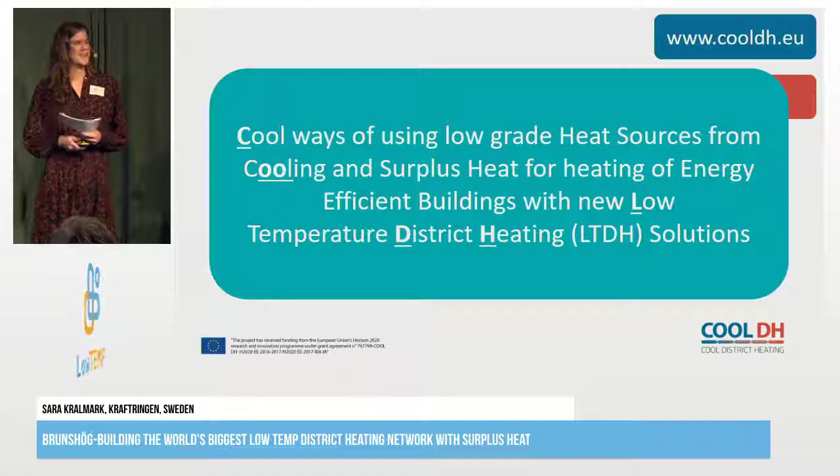I hope you're excited, I am. So the name of the project I'm working on is Cool District Heating, Cool DH - that's the homepage and also the hashtag if you want to use it. If you think the name Cool DH is because it's a cool, awesome project, then you're right. But you're also right if you think it's an abbreviation for cool ways of using low-grade heat sources from cooling and surplus heat for heating energy-efficient buildings with new low-temperature district heating, LTDH, solutions. It's also fine to just think of it as a really awesome project.

But first, some information about the company I work with, Kraftringen. Kraftringen is a municipally owned energy company headquartered in the city of Lund, just 20 kilometers from where we're sitting right now, with 260,000 energy customers and a little over 500 employees. We're counted as one of the largest energy companies in Sweden, and one of the things we do is district heating.

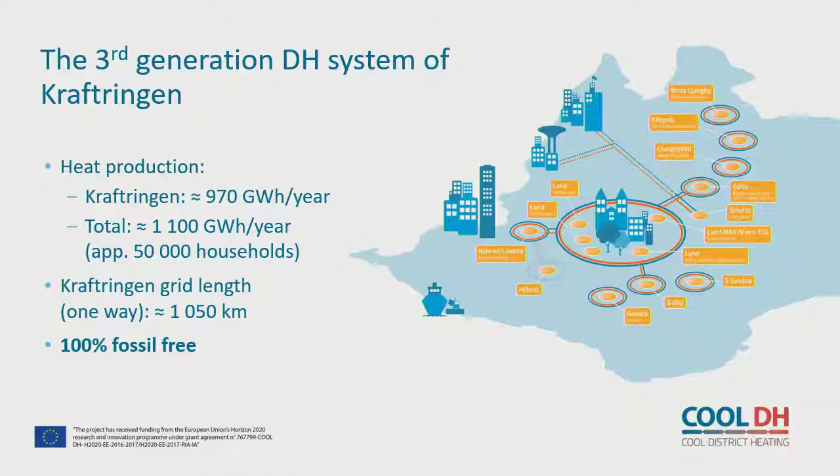Our third generation district heating network is just a little over 1,000 kilometers long, and it's connected to the networks in the cities of Helsingborg and Landskrona. We've formed a joint venture with the energy companies in those cities, allowing us to really optimize the efficiency of production. The amount of heat produced and distributed in Kraftringen's part of this giant network is 970 gigawatt hours per year - that corresponds to about 50,000 households for those of you who aren't nerds like I am.

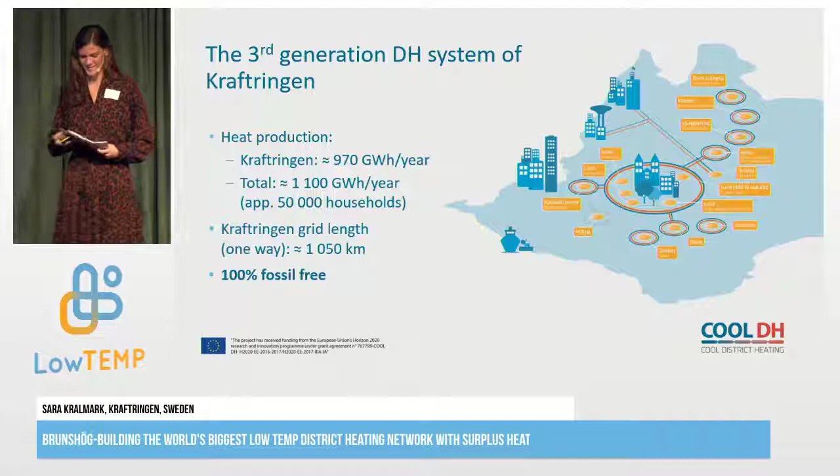We had the goal of making our district heating completely fossil-free by 2020, and we reached that goal last year in April. Yes, yes - you're way better, though, than my family and friends on this specific topic.

In addition to our normal, traditional district heating business, we're in the process of building the world's largest low-temperature district heating network. This is something we do in a city district in Lund called Brunshög, as part of the Cool DH project, which receives funding from the European Research and Innovation Program Horizon 2020.

Now, not only Sweden is part of the Cool DH project, Denmark is too. Do we have any Danes in here? Yes - you can clap now.

So in Sweden, we're building a network which will have a supply temperature of 65 degrees. You know why that's good? Because Britta and Sven and Kerstin told you before the break. It will be about 6.5 kilometers of pipes, and we're building it in previously undeveloped land.

In Denmark, they're building a smaller network. It has a supply temperature of 55 degrees, and they're building it in an area with mainly existing buildings. This project started in October 2017 and will continue for four years, until 2021. The aim is to develop, then demonstrate, then verify new and path-breaking solutions for district heating with low temperature, and of course to spread the knowledge, like I'm doing right now, to you guys, to Denmark, to Europe, and to the rest of the world, because this is very unique.

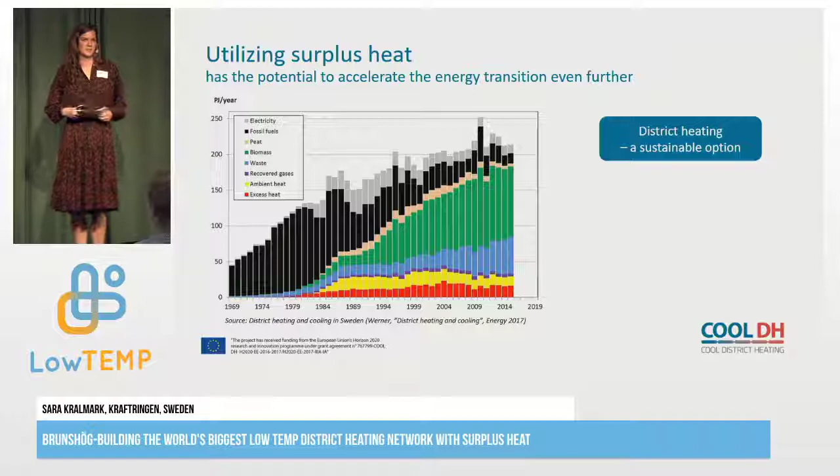During the last 40 years, Swedish district heating production has increased by 4 times. That's awesome, right? But at the same time, emissions from district heating have decreased by 90%. It means Swedish district heating companies have shifted from the black field, fossil fuels, to mainly green, which is biomass, and also the blue, some waste incineration.

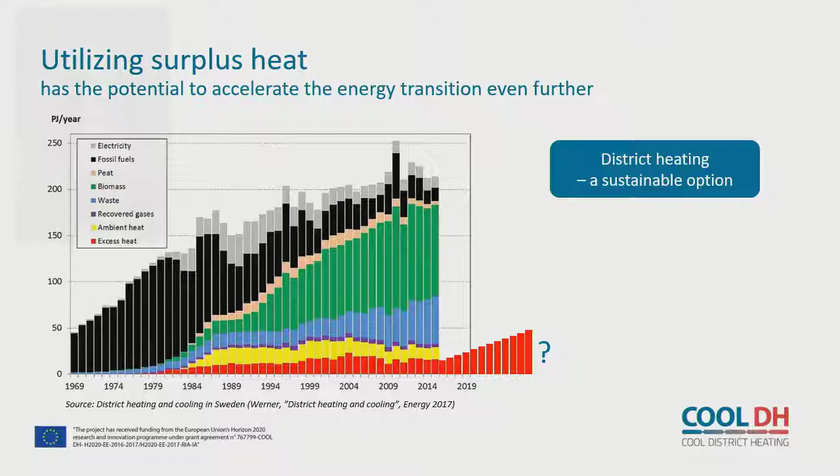Kraftringen is in the green field, 100% fossil free. Then we have the red field at the bottom. It says excess heat, and the question is how large the potential of excess heat in Europe is. That can answer why the European Union wants to finance a project on low temperature district heating. That's the context of this.

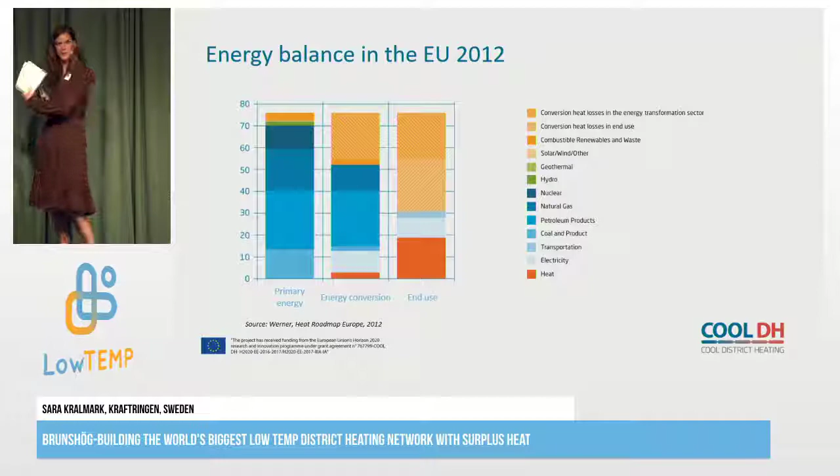I will guide you through this diagram. It shows the European journey from primary energy, that's to the left, for example in the form of nuclear power, some hydropower, I guess that's Sweden, and natural gas. To the right, you have what we use in the end, for example electricity, a nice kind of energy. We also have quite a lot of heat. What happens in the middle is that we convert the energy.

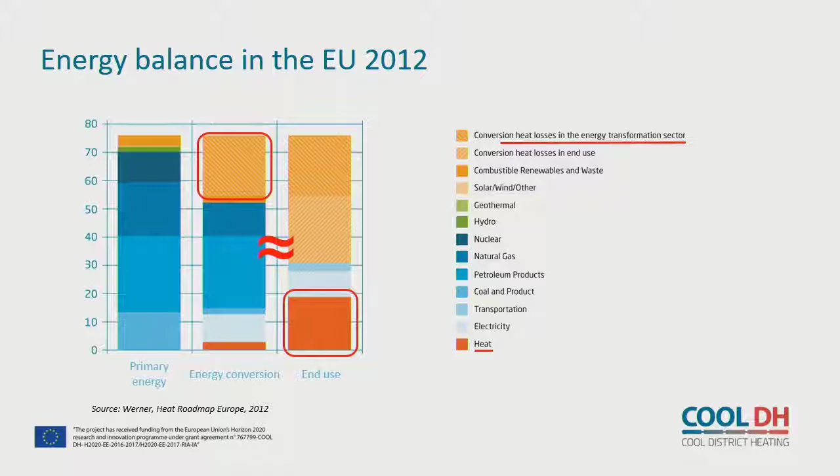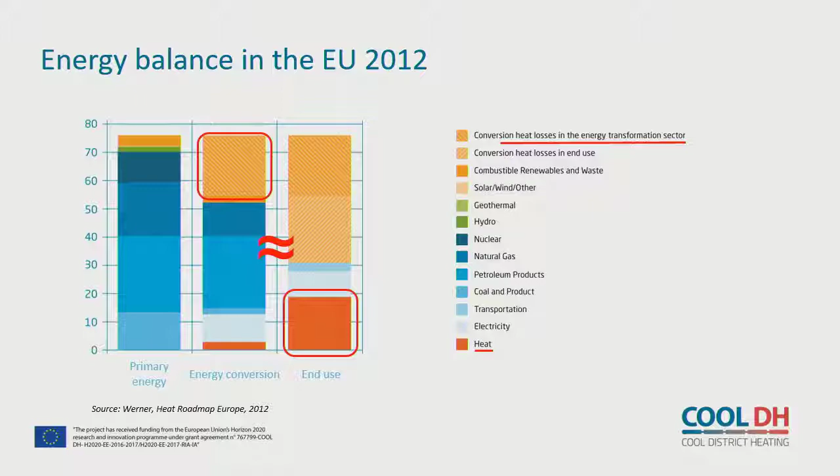It just so happens that during the conversion processes, we get a lot of excess heat, approximately just as much as the heat load that we use in the end. What I'm saying is that if we could just use all of the excess heat being produced only within the energy sector in Europe, Europe wouldn't have to produce any heat actively at all. That's a large potential, I would say.

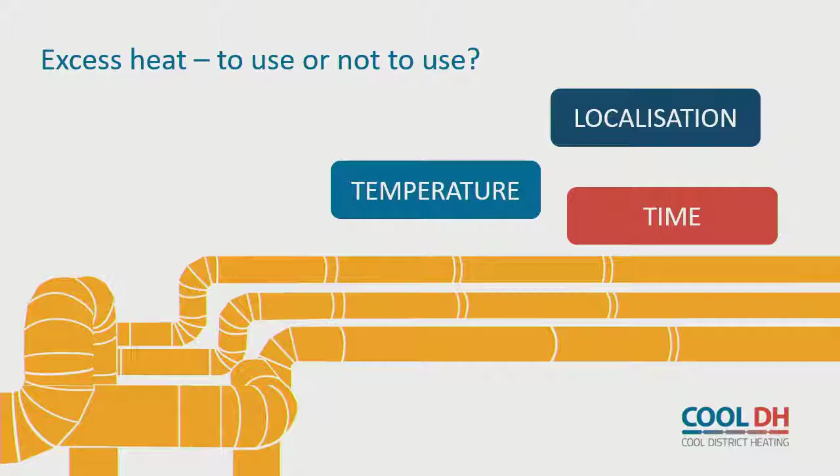So why is the utilization so limited? Well, it's not very hard, no one's being stupid. It's because of three factors that all affect the economy: time, temperature, and localization, I usually say.

Time, because this kind of residual heat often doesn't come when we want it. It also fluctuates a lot. It's like solar power or wind power. It's not a very reliable heat source.

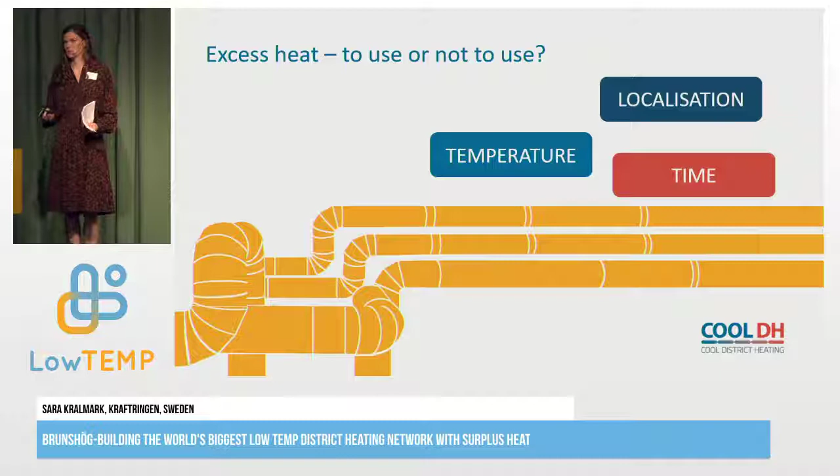Localization, because it may only be available at places far away from a city district or where there is a need for heat. You need a district heating network to actually distribute it, and that's not always the case. And finally, temperature, because very often this residual heat comes at temperatures that are wrong, meaning too low to be used in the traditional 80, 90, or 100 degree traditional district heating networks.

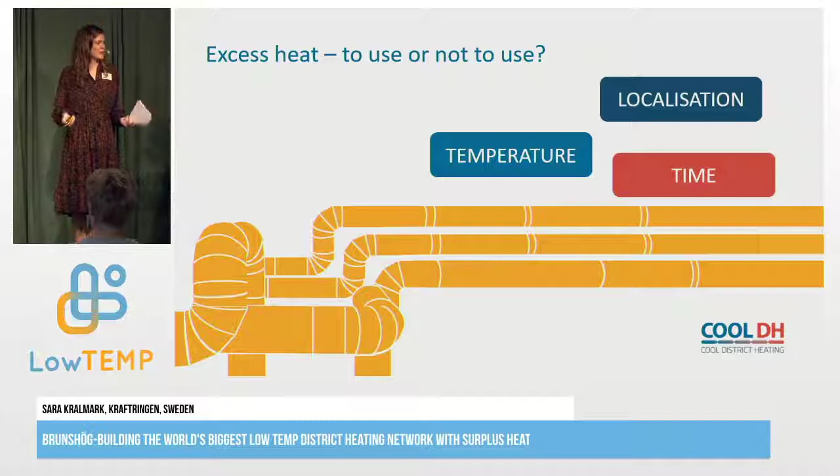So with this background, I will now tell you about the Swedish district heating CoolDH site, which is a place where we are overcoming all of these three factors.

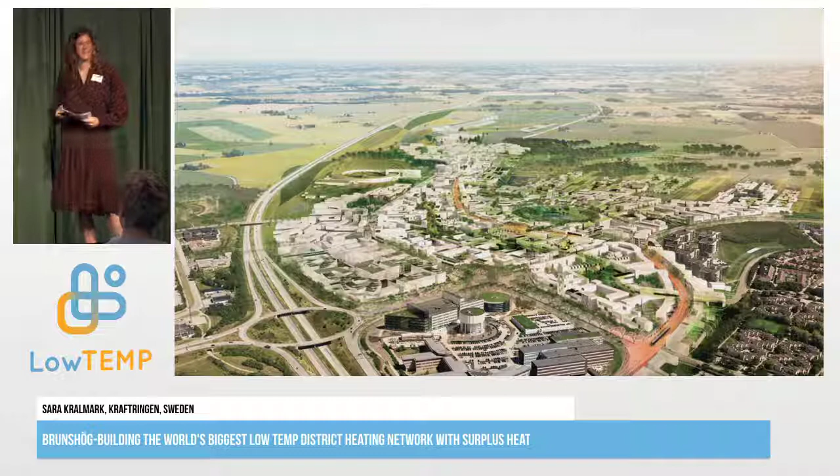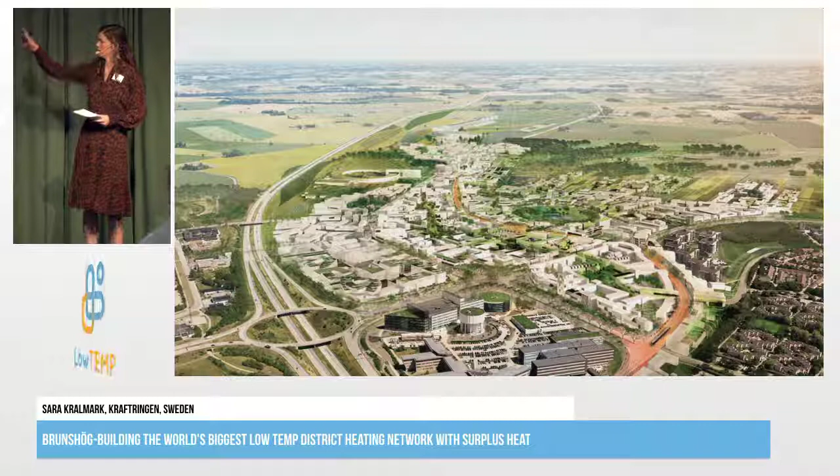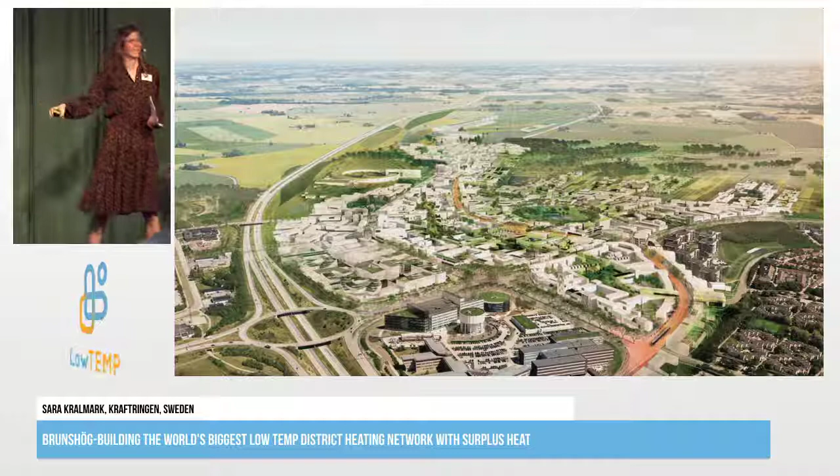Yeah, wow, this is a vision image. Thank you, Reto. This is a vision image of a new city district being built in the northeastern part of the city of Lund. In the future, we will have 40,000 people living and working in this area. For you Swedes, that's like taking the city of Trelleborg, I'm from Skåne, and putting it in the outskirts of Lund. It's quite a large city district.

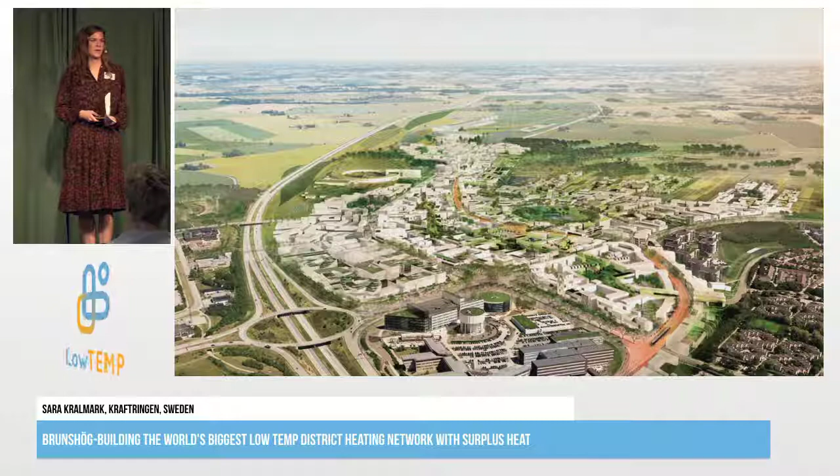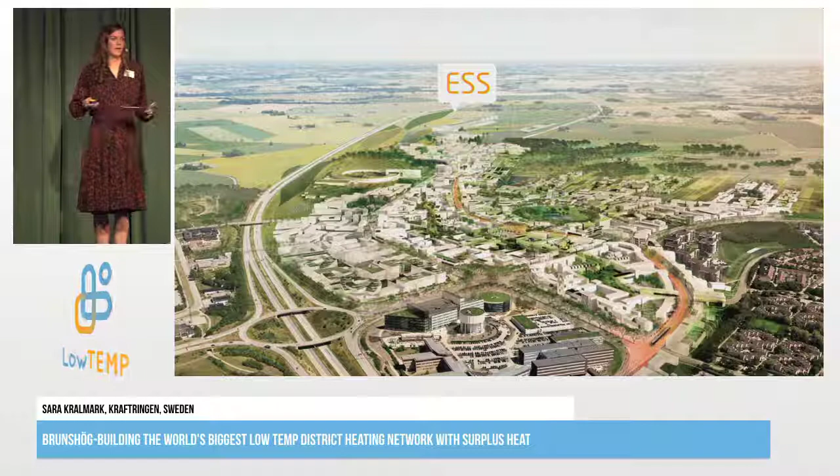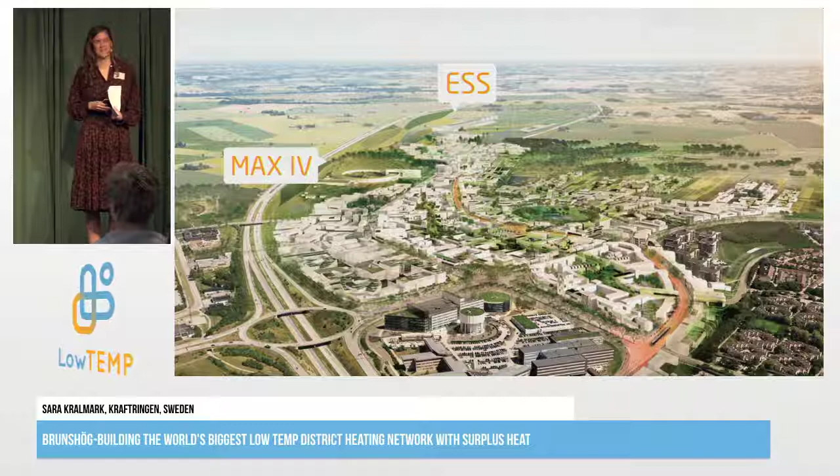The main reason for expanding Lund in this area is the ongoing construction of the International Research Facility European Spallation Source, or ESS, as you might have heard of. It's also because the already existing Swedish research facility MAX IV, located just adjacent to ESS. For your information, yes, there is a MAX 1, 2, and 3, but they're much smaller, more like normal laboratories, further down in the central part of Lund.

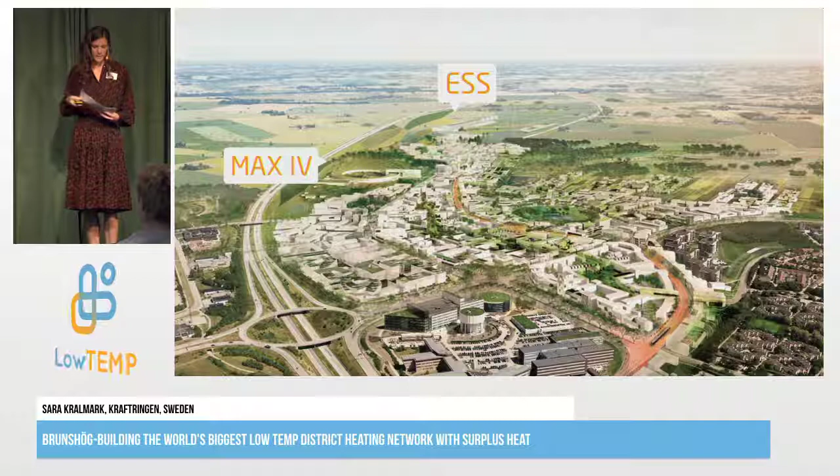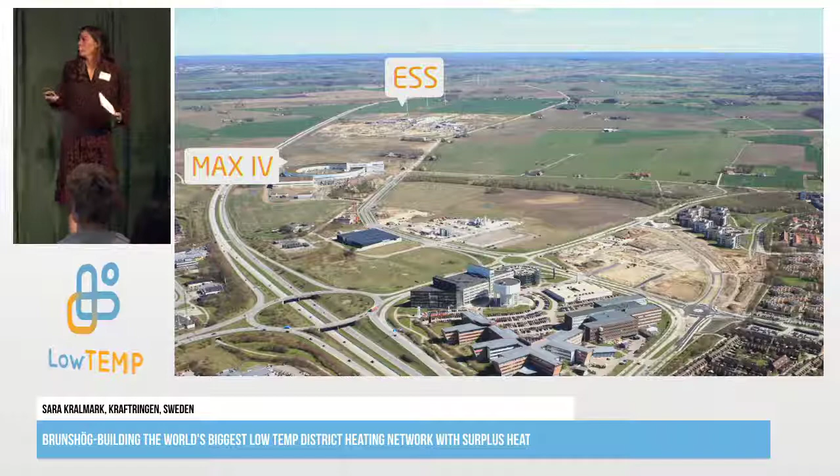However, this is what Brunshög looks like today. Yep, it consists mostly of fields, and even though they've started to build buildings down here in the southern part, it will take decades before the whole area is covered with buildings. But the municipality of Lund has set up really high goals for this area.

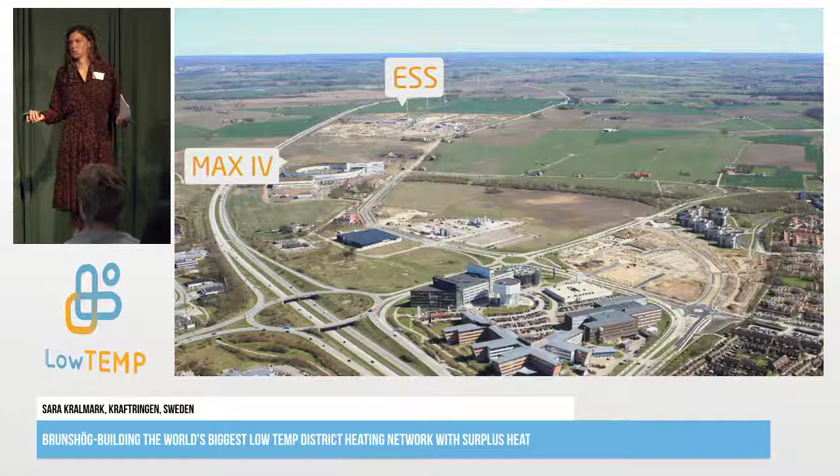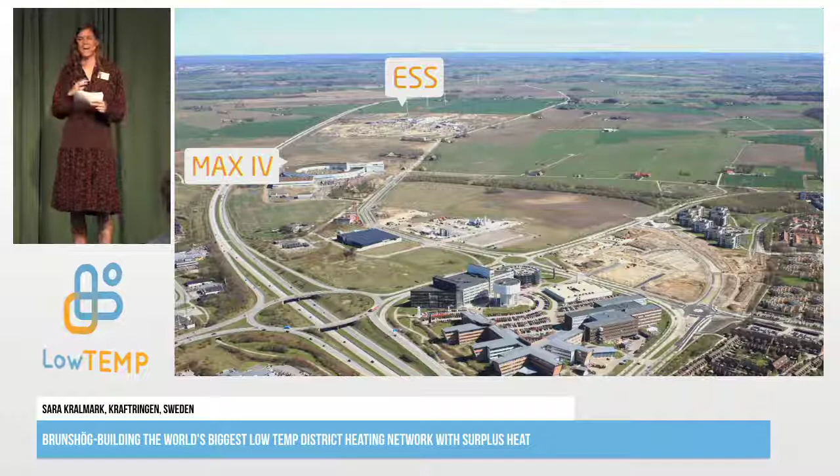Ideally, they want it to be self-sufficient in energy. That's a goal they want to reach by building really energy efficient houses. Also, they want to utilize solar power. And above all, they want to use the enormous amounts of residual heat coming from ESS and MAX IV.

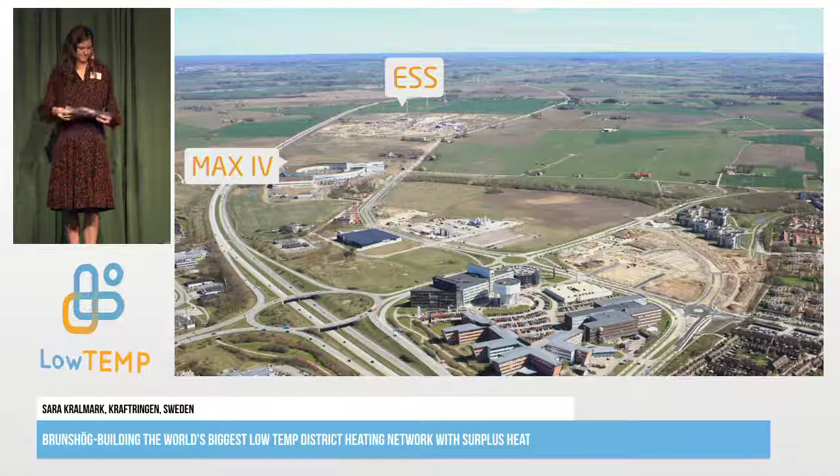So let's look at MAX IV. It looks pretty much like a donut. This is an awesome research facility. MAX IV was built and then opened in 2016, so it's been up and running for a couple of years now.

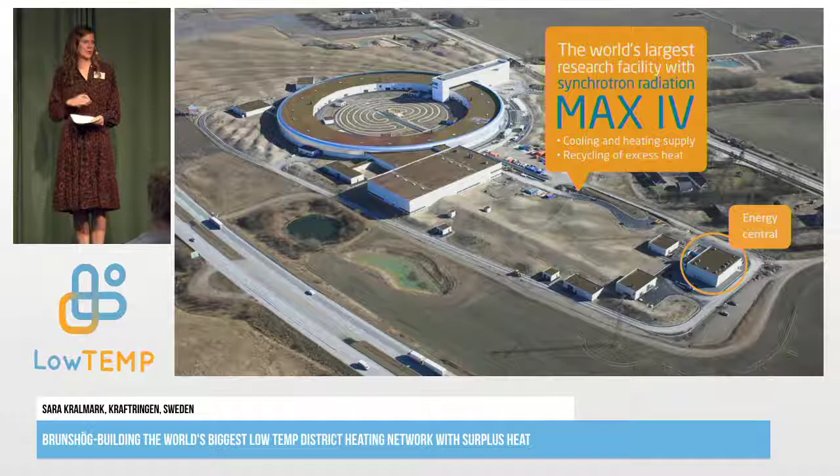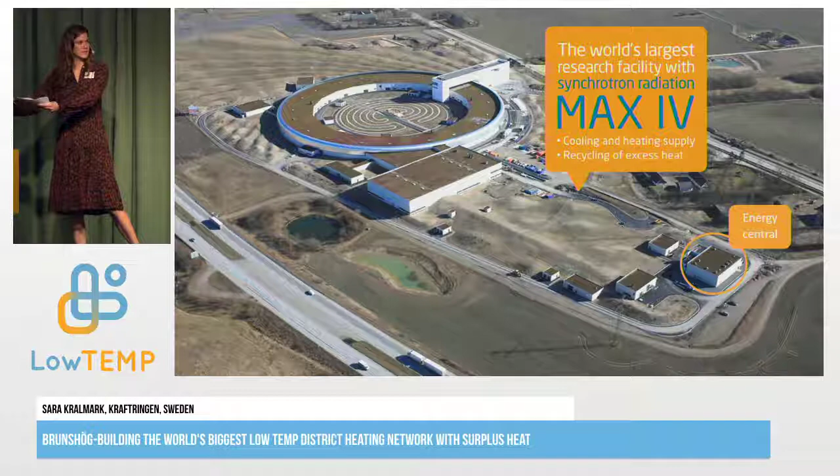The processes inside MAX IV, where they accelerate particles, are extremely temperature sensitive. They're also extremely energy needing. They have a large heat demand, and they create a lot of surplus heat. And this heat needs to be cooled away, and cooling something is actually exactly the same thing as taking away heat.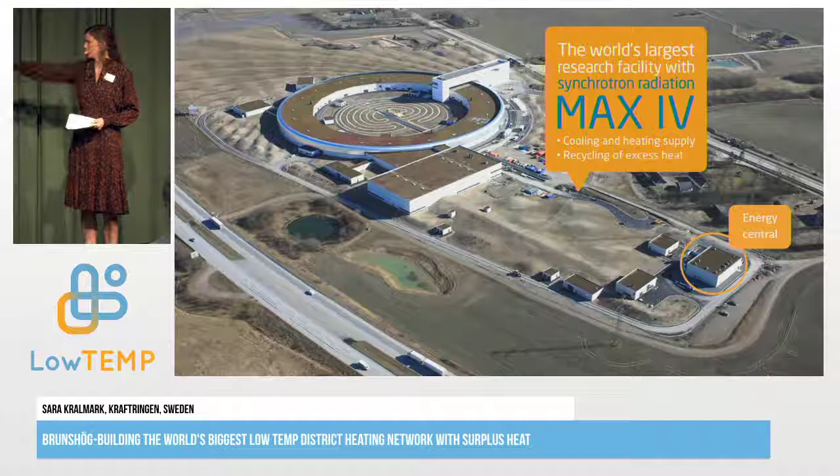And as such, we've built an energy central. Kraftringen has built an energy central from which we deliver cooling, meaning that we're taking away heat from them. And also sometimes during the year, during winter, we supply them with some heat also, but they don't need that very often.

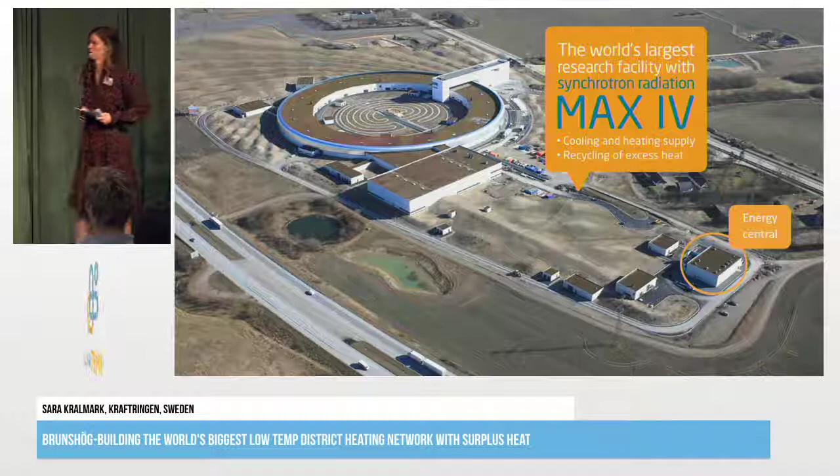Sorry, I've had a bit of a cold and it's not completely away yet.

This is what it looks like inside MAX IV. So we take care of the heat generated inside MAX IV in 3 different systems. One system is for normal climate cooling inside the building, and 2 of the systems are for cooling special process equipment. And at present, you can see the temperatures are pretty low. We're not talking about 100 degrees here.

What we're doing right now is using heat pumps. So we get some heat from MAX IV and then we raise the temperature up to 80 or 90 degrees. And then we distribute it on our traditional, normal district heating network that covers Lund and goes all the way up to Helsingborg and Landskrona.

That's happening today because this facility is already up and running. It has been since 2016. So science is already heating the city.

However, as the new district of Brunnshög grows and establishes an increasing heating demand, we will gradually increase the amount of heat that, instead of being raised up to 80 degrees, will get raised just a little bit, up to 65 degrees. And then it goes out to the Brunnshög area.

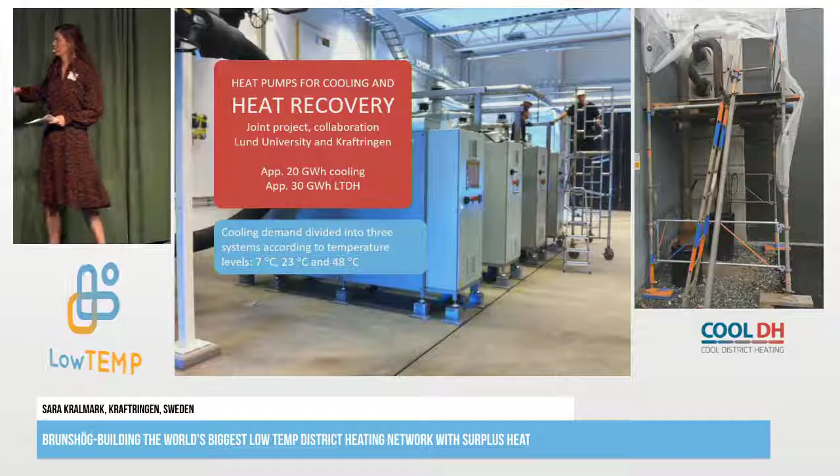So the picture to the left, that's inside of the Energy Central. And here to the right, I took this picture last week. This is from outside, and you can see pipes going into the Energy Central. That's our low temperature district heating network, the pipes going in there.

It's happening right now. This was a couple of weeks ago, we did the final thing. And you know what? We have our first delivery today. In 1 hour, my colleagues will be up there at the first customer, and they will do a switch or something, and it will start flowing. So, yeah, it's amazing. What a day.

We can't say exactly how much heat we will get from MAX IV in the future, because they're waiting to get financing to do things inside the facility. But it's estimated that we will get to deliver 20 gigawatt hours of energy cooling every year, and we will also be able to, through that cooling, get heat and then deliver 30 gigawatt hours of low temperature district heating to Brunnshög. And I can tell you now that 30 gigawatt hours of 65 degree district heating is more than enough. We don't even need that much. We will still be putting out some on the traditional network.

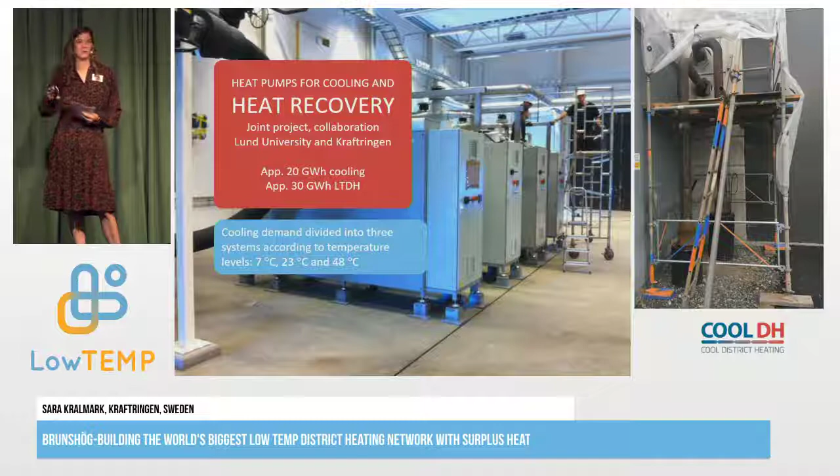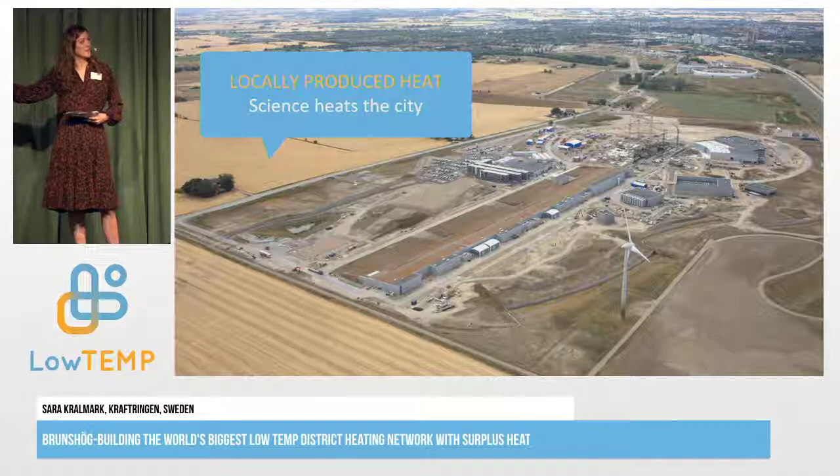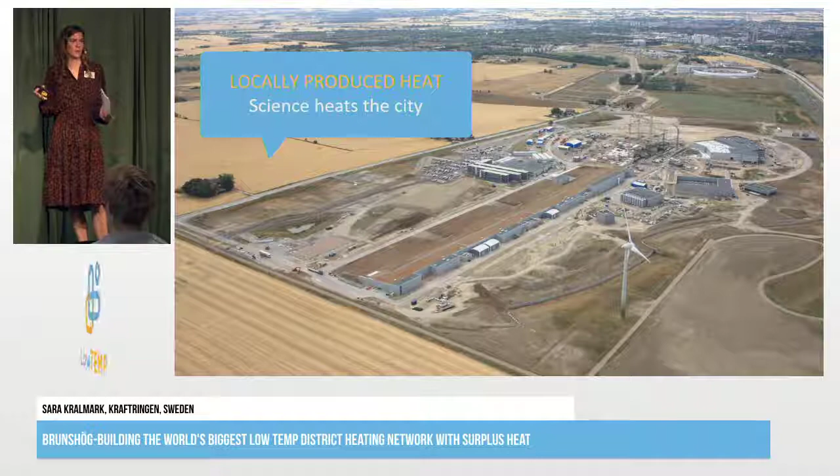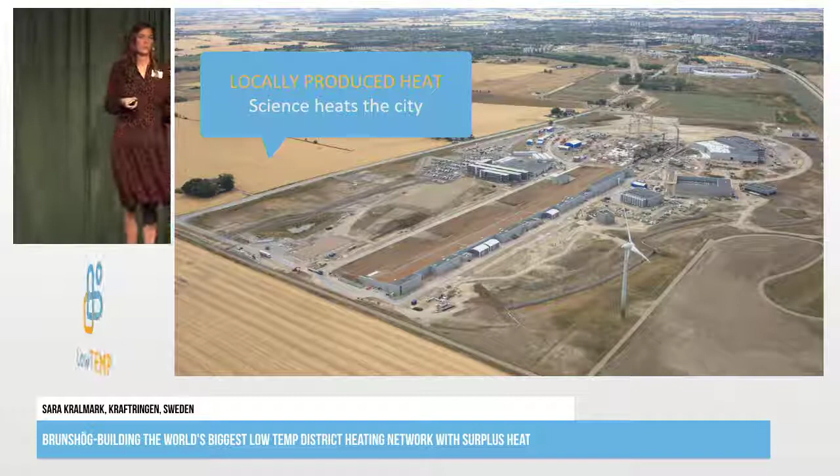In addition to that, we have the research facility ESS, which is even greater. It's an international project, still under construction, but we have prepared a pipe from our normal, traditional district heating network going all the way up here. ESS will in the future produce about 200 gigawatt hours of energy or heat per year. Half of that will be high temperature, ready to be distributed in the pipe we prepared many years ago, and half of it will be lower temperature. What I'm saying is that we have a lot of excess heat in Brunnshög.

So with this background, let's talk about what we're building.

I stated a moment ago that the problem with surplus heat is often three things: time, temperature, and localization. Localization is not a problem in this area. We're building the houses right next to the research facilities, right next to the heat source. Time is not an issue either, because the science in these facilities will be constant throughout the year, even though we have some pauses in their activities.

Then we have our high temperature network, which is also inside of MAX IV Energy Central, so we can just borrow some heat for a week or so if it's necessary. So we're backed up by our traditional network. And then temperature is not a problem either, because we are preparing the network so that it works well with the low temperatures that we get.

So we're building a network with a supply temperature of 65 degrees, and we're hoping to get a return temperature of 35 degrees. It's important that we get low return temperatures because it's a small network compared to our big one, and each customer affects the production really much. So we need good customers with good substations. We think we can get back 35 degrees or lower, actually. We will have 10 bars, which is lower pressure than in our normal network.

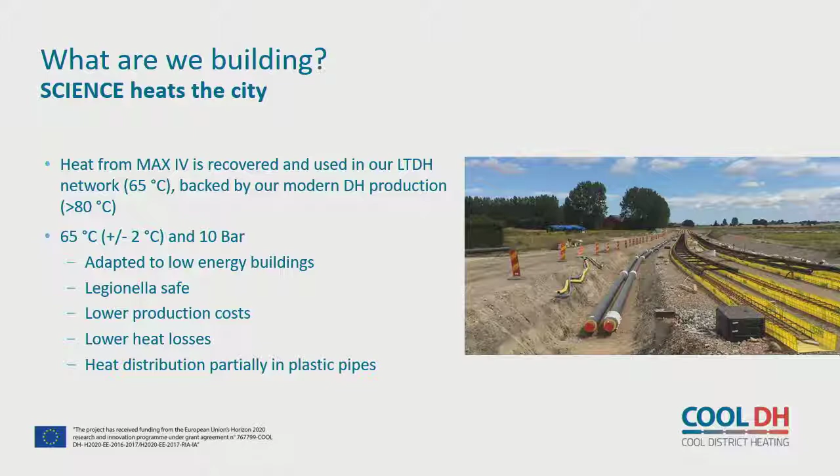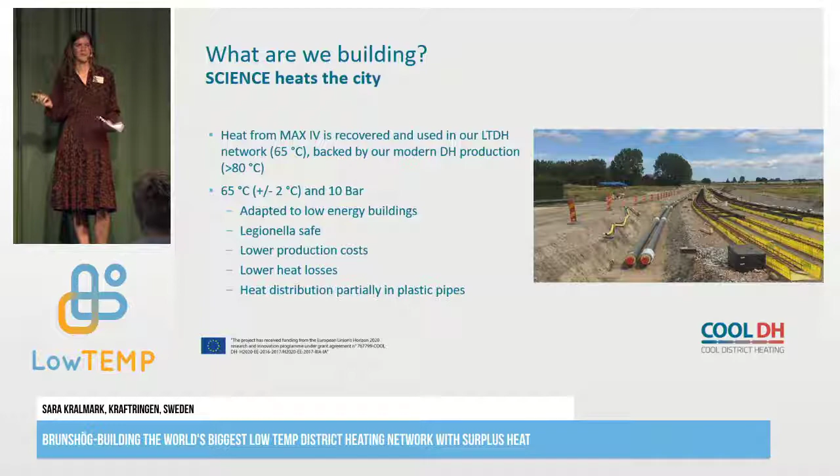And this is where I usually lose my family. We get to distribute it in plastic pipes. Oh, you don't get it either, do you?

Okay, let me tell you the awesome thing about plastic pipes. So, normal district heating, there you have pipes made out of steel. And you need steel because you need a material that can endure the constant stress of providing almost boiling water, right? You need steel. However, when you lower the temperature, you don't need steel. You can use plastic.

It's not awesome yet, but it's going to be. If you use plastic, the pipes become bendable, right? Flexible. And also it's cheaper. Of course it's cheaper, we hope so.

So the normal steel pipes, they come in sections, 15 or 20 meters, and they're pretty heavy. You need machines to lift them off and put them down in the ground. And when they're in the ground, you need space to have people welding, right? And the shaft, the cross-sectional area of the shafts, needs to be quite wide. This is what costs money. You need machines digging and waiting for people to be there and welding. That's where all the costs are. 75% of all the costs in a construction project come from that part.

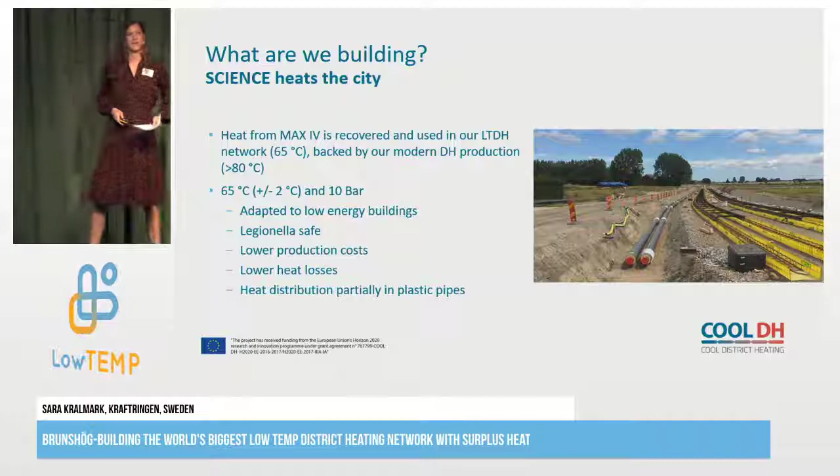Yeah, thank you. Okay, so let's do it again. We're using plastic pipes. And luckily for you, we have representatives from the pipe company here, Logstor. You there? No? There you are, I have you. Please go and talk to Logstor, they know their stuff. They're developing these kinds of pipes for us.

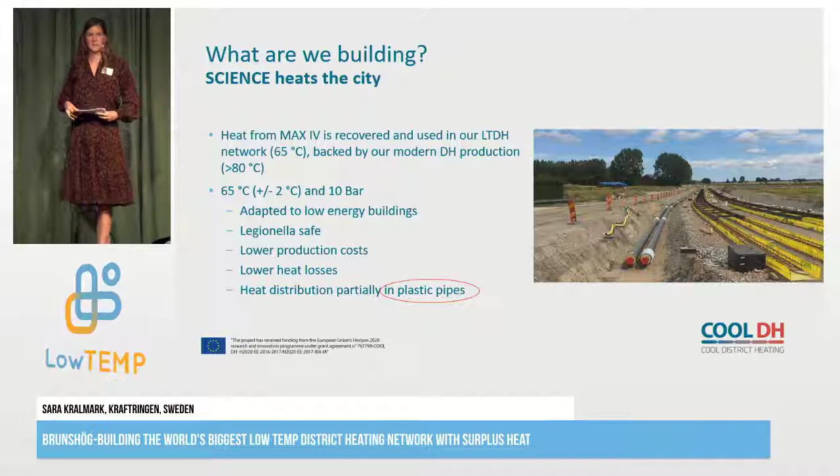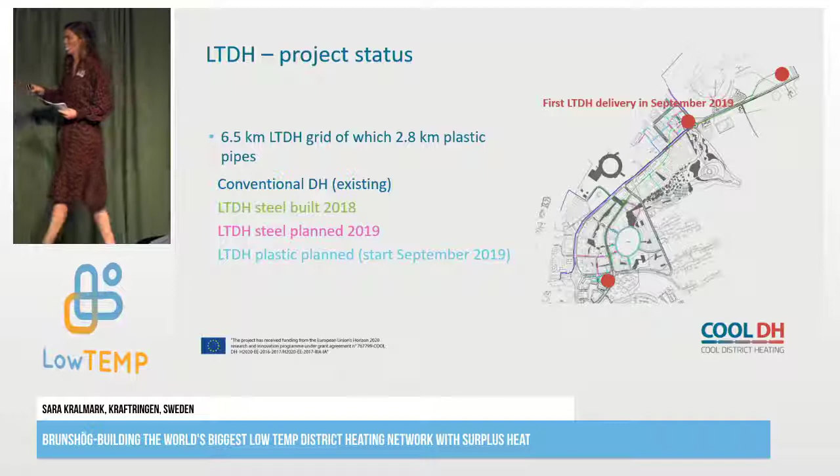So, short about how far we've come. This is a picture of Brunshög. So we have the most southern part. Our grid goes from there up all the way to the most northern part, that's the European Spallation Source. That's about 2.5 kilometers, it's quite a long area.

And so we can see, you see the dark blue lines, that's our conventional district heating networks. So it comes from the center of Lund, goes up to MAX IV Energy Central, and further on to ESS, right? I told you about that. And then we also have the green lines, that's things we've already built, that's steel pipes. Didn't we talk about plastic pipes? Yeah, I did, but as I said, we've been developing the plastic pipes, and we needed to start building the network 2 years ago, so we started with steel pipes.

But now, last week, there's so much happening right now. Last week, we started to use our plastic pipes.

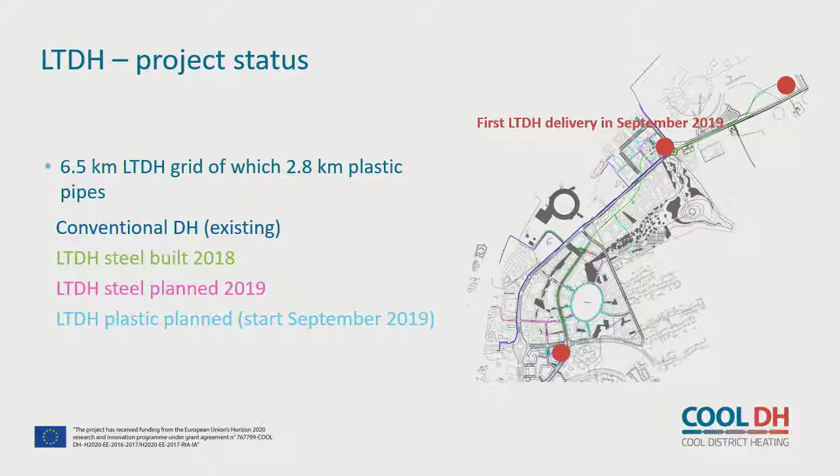How much time do I have? Not very much. Okay.

So if you want to hear more about the project status, you can listen to my colleague Marcus in one of the sessions this afternoon. I've just been teasing you right now.

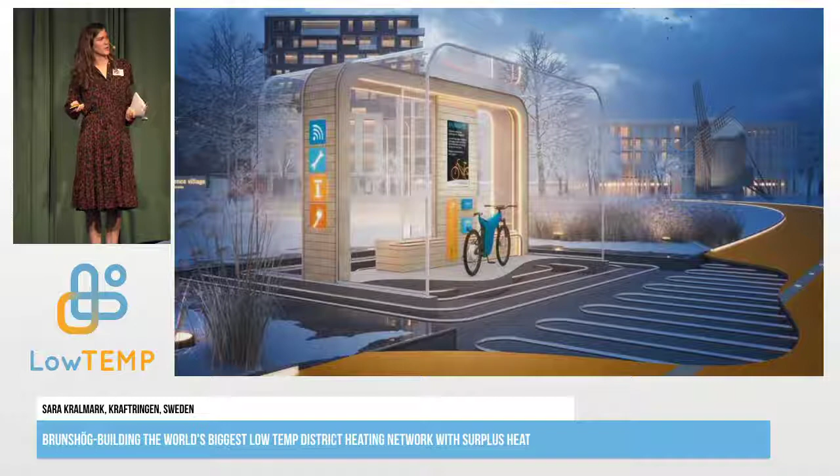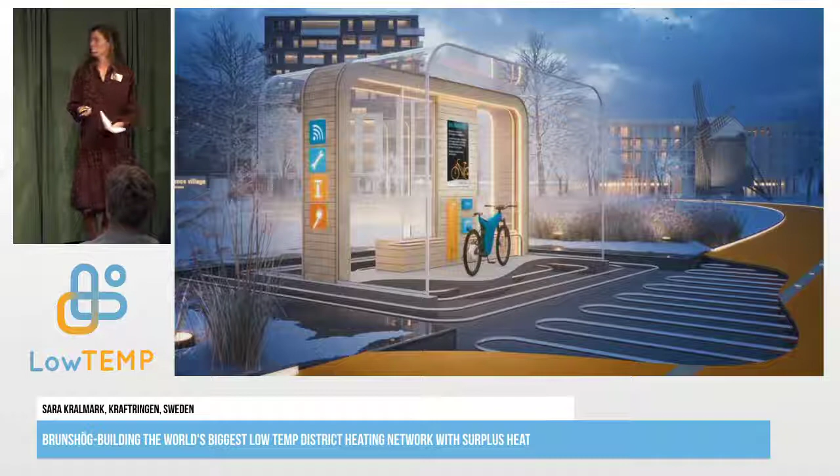So we have a lot of excess heat in Brunshög. Our vision a couple of years ago was this: we thought, why don't we use this heat for ground heating when we have so much of it? We want this to be an attractive part of Lund to live in. So we spread this picture.

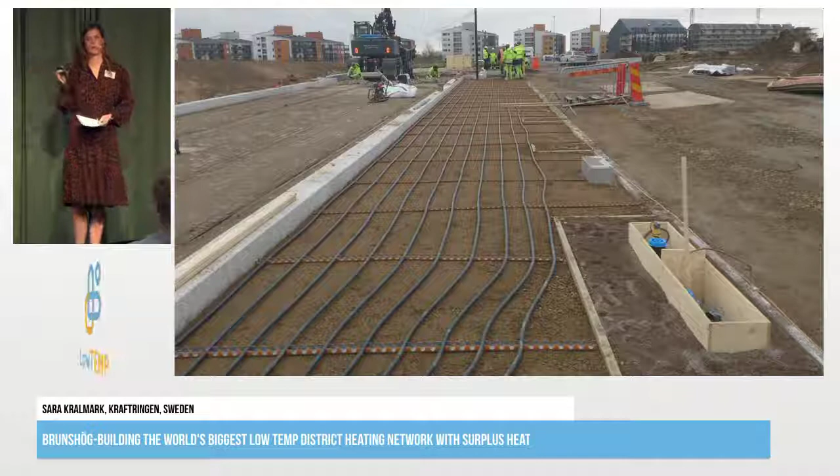And you know what? This picture was taken in February this year. There will be ground heating on two of the squares in Brunshög, and also at all the tram stations where you wait for the tram. That's pretty cool. And also, just before we did this, there was an article from Chalmers University saying that it's awesome with ground heating. So that was very nice to hear.

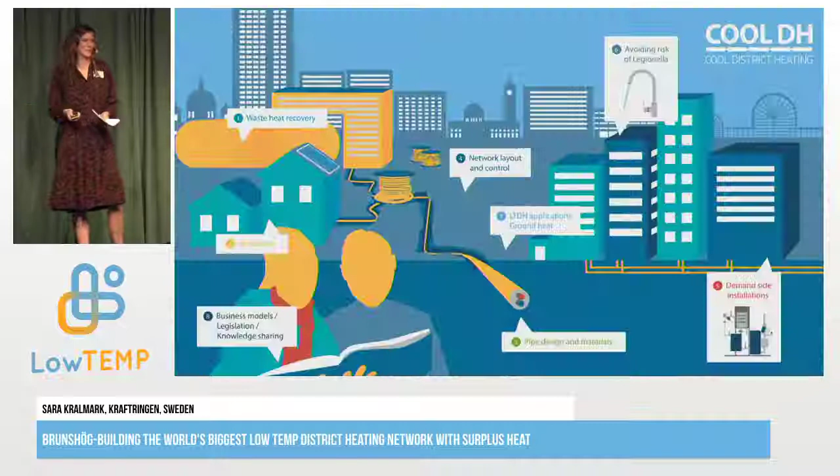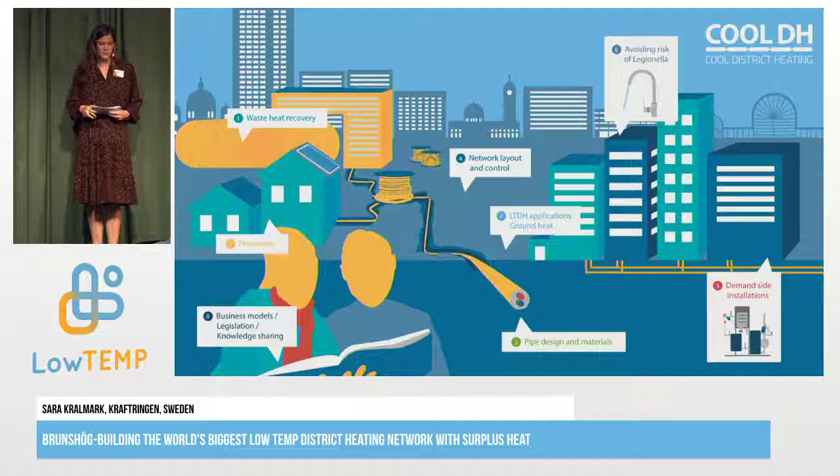And then finally, this is the Swedish part that you've been hearing about, but in total, in the COOL DH project, we're doing a lot of things. We're working with waste heat recovery. We're also investigating how other prosumers, like people with solar collectors or food stores with excess heat, can become producers in our grid.

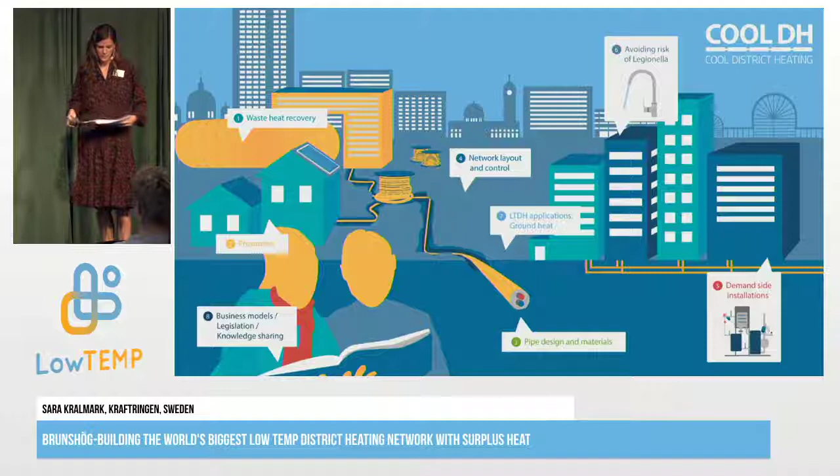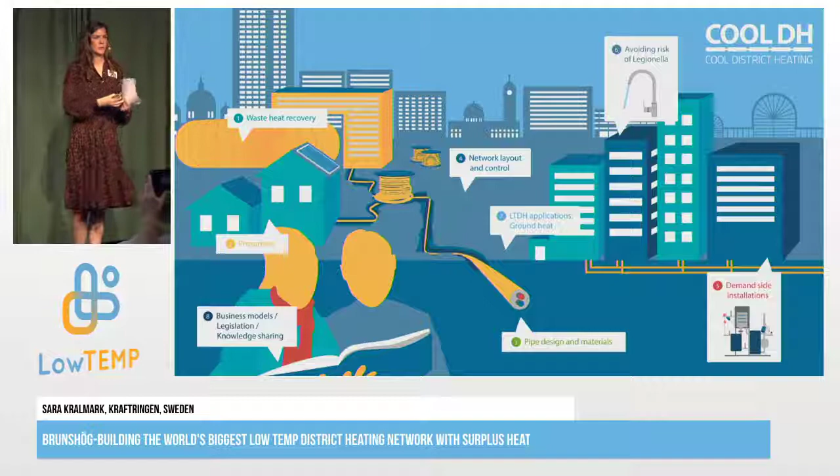I've been looking at the business models. We're looking at the network layout and control, and we're looking at how to optimize the substations in the customers' houses. We've been doing this study on Legionella, which Justin told you about.

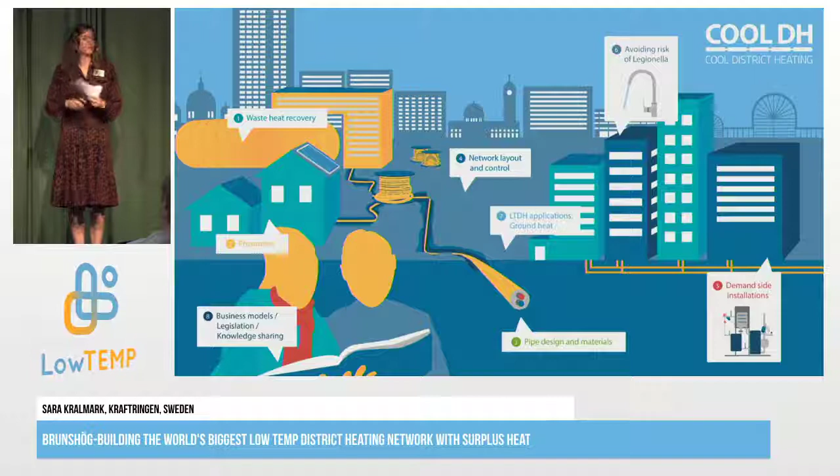There's a lot of things happening, and you can read all about it on coolDH.eu or on the company webpage Kraftringen.se. Thank you.

Thank you very much, Sara. Tack så mycket. Exactly on time, and a very, very interesting presentation. Thank you. I'm sure that we have questions from the audience.

Yes, at the back. Hi, my name is Arvid Rensfeldt, and I work for Profu, a small consultancy and research firm. I was wondering, since ESS will supply a lot of high-temperature heat as well that you will feed into the old third-generation grid, how is that likely to affect your local electricity power production from your CHP plant in the future?

Very good question. I'm not able to answer it. No, actually, there is an answer, but you will have to go to the technical presentation this afternoon instead. Because it's such a long answer, I think. But thank you for the question. Yeah, no problem.

No, back there, there was another one. Yeah, hi, Jonas, also sustainability and district heating nerd. You said that the amount of local waste heat generated from MAX IV was enough to supply the whole district of Brunshög in the future. So I was thinking, do you have any specific plans what to do with the waste heat generated from ESS?

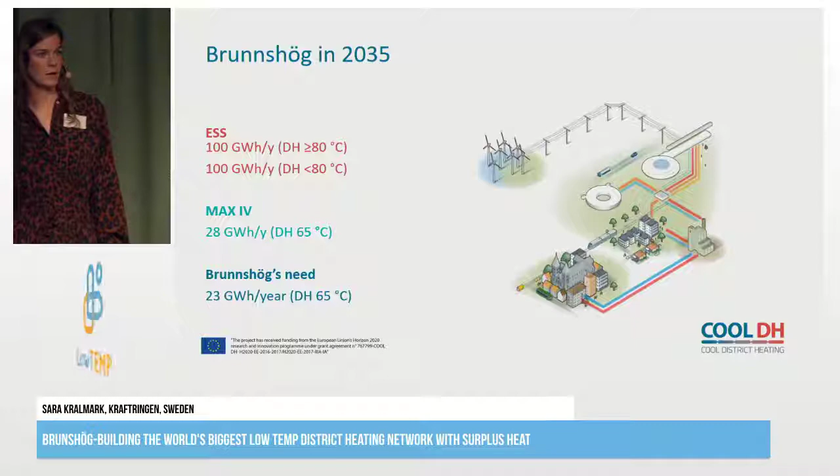And to clarify that even further, I prepared: we calculated that in 2035, when you've come a long way in building the district area, we think that Brunshög will need about 23 gigawatt hours of energy each year. That's covered completely by MAX IV.

And then in addition to that, we have the ESS, so we have a lot of heat. That's why we're trying out the ground heat and other applications. So please, if you have ideas of what to use this heat for, tell us.

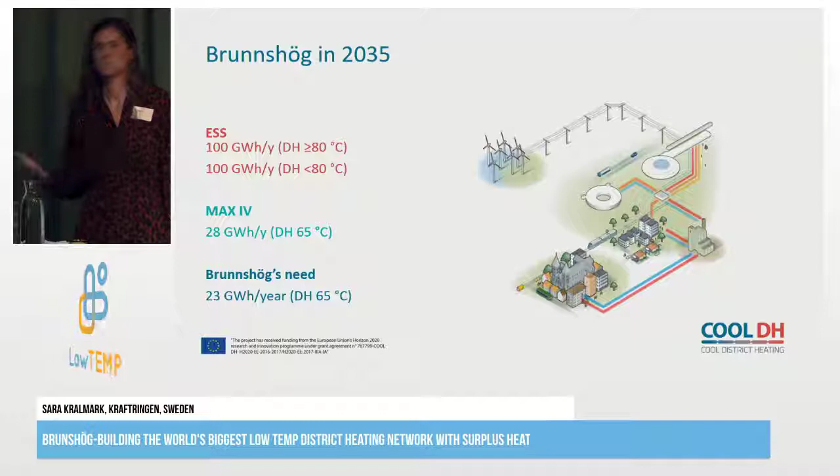Thank you. Okay, actually everybody went out in the break so fast that I never got to talk about the idea board. So if you have ideas that are not coming up in the workshops, please feel free to scribble away on this idea board. Yes, can you repeat it again?

Yes, that's a very good—repeat the question again: if you have any... What do you want us to do with the enormous amounts of excess heat that we have? Please let us know later in the workshop or on the idea board.

Great, thank you very much, Sara. Tack Sara. Woo! Tack. Har du en present igen också?